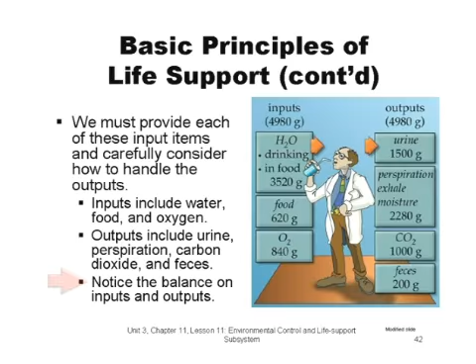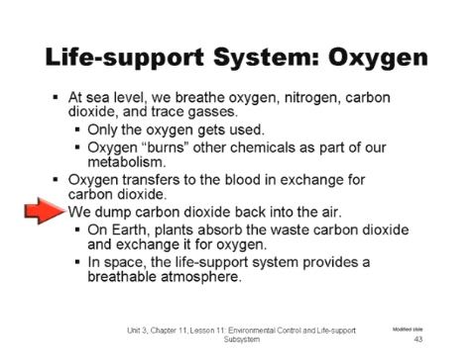In space, it's not that simple. In space, the life support system must provide a breathable atmosphere, which includes oxygen at a high enough partial pressure to allow for comfortable breathing. Without that, astronauts could not survive. The term partial pressure refers to the amount of the total pressure accounted for by a particular gas. The symbol for the partial pressure of O2 is ppO2, and we're quite comfortable with the ppO2 at sea level.

After becoming acclimated, people living at high altitudes, above 6,500 feet, show little discomfort with a lower partial pressure. The Space Shuttle's life support system maintains a partial pressure of oxygen close to Earth's sea level standard ppO2. You can see here a European Space Agency astronaut wearing a suit used to maintain the correct atmosphere around the astronauts in case there is a loss of cabin pressure during launch or re-entry.

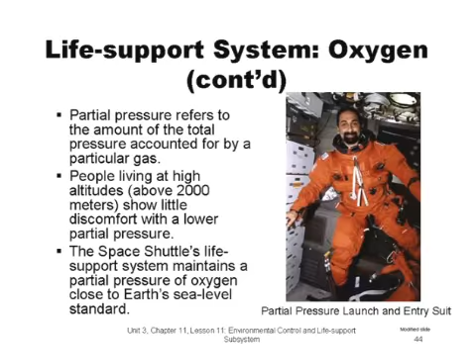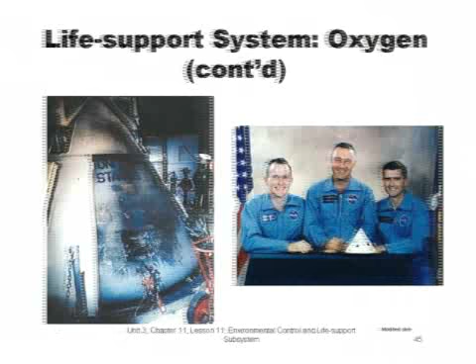Since oxygen is all we really use when we breathe, why not just use all oxygen in the crew cabin instead of air? When the partial pressure is too high, oxygen is actually toxic. Also, a pure oxygen environment can make it far too easy to start dangerous fires. This slide shows America's first major space tragedy, and it illustrates why we no longer fly with a pure oxygen environment.

On January 27, 1967, on Launch Pad 34, Edward White, Virgil Gus Grissom, and Roger Chaffee died in a fire during a routine pre-flight test on the launch pad. A spark started a fire in the Apollo 1 capsule that quickly got out of control, killing all 3 astronauts. Heroic doesn't begin to describe these men who, even though they were fully aware of the risks involved, still chose to head the mission for the cause of advancing our understanding of space.

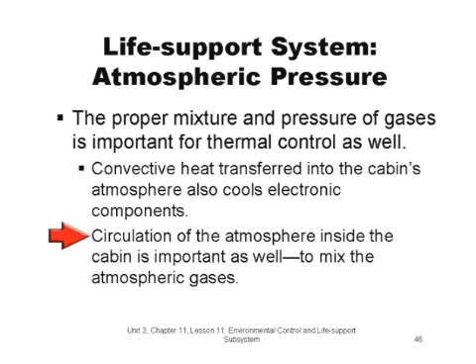The proper mixture and pressure of gases is important for thermal control as well. As we learned in the last section, convective heat transfer using the cabin's atmosphere can be used to cool electronic components. Circulation of the cabin's atmosphere is also important to ensure good mixing of the atmospheric gases in freefall.

Another key concern related to atmospheric pressure is that whenever astronauts do EVAs or spacewalks, they must leave the crew cabin atmosphere and use a spacesuit that provides all the comforts of home, including oxygen at the right partial pressure.

Unfortunately, if the total pressure in the spacesuit is near sea level conditions, it would be so stiff astronauts wouldn't be able to bend their elbows or close their fists. Imagine holding a tennis ball and trying to squeeze it tight.

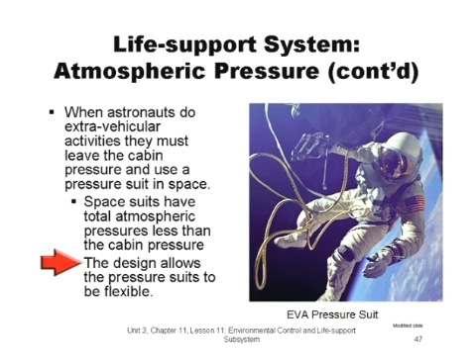For this reason, some spacesuits operate with a total atmospheric pressure lower than the cabin pressure. This pressure level allows the suits to be flexible so astronauts can more easily move around and work. However, this means lowering the cabin pressure several hours before a planned EVA so astronauts can get used to the lower pressure before stepping into the suit.

But problems can arise when people change from higher to lower atmospheric pressures. People may experience the bends we often associate with scuba diving. The bends occur when divers move too quickly from high to low atmospheric pressures. Scuba divers breathe in air. When a scuba diver is deep underwater, the pressure is higher, so more of the nitrogen in the air gets dissolved in the bloodstream. If they come up too quickly, that nitrogen can form bubbles in the blood, causing severe pain in the joints and even death.

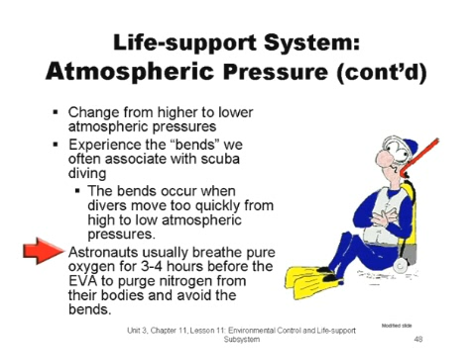To avoid this problem, spacesuits use a pure oxygen atmosphere with a partial pressure sufficient to sustain life. Before going outside, astronauts breathe pure oxygen for 3 to 4 hours to purge any nitrogen from their bodies so they don't get the bends.

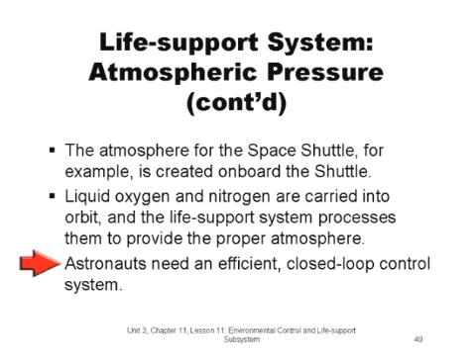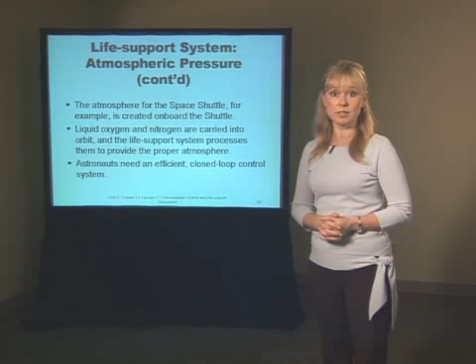Astronauts must take everything they'll need with them when they lift off. The space shuttle's atmosphere must be created and sustained with the resources on board. The shuttle carries liquid oxygen and nitrogen into orbit, and the life support system processes these raw supplies to provide the proper atmosphere. To do this effectively, astronauts rely on an efficient closed-loop atmospheric control system. Can you remember the difference between open-loop and closed-loop control systems? If not, go back to the section on control systems so you understand the concept.

Now, let's discuss other necessities, such as food and water. Just like you, astronauts get hungry and thirsty after a hard day in space and want something tasty and nutritious to eat or cool and refreshing to drink. But getting into space is very expensive, so we must determine exactly how much food and water to bring along. Too much and we waste precious cargo mass. Too little and astronauts go hungry.

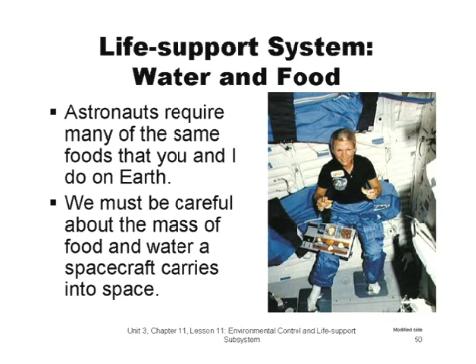The average person requires about 29 calories per kilogram of body mass per day to maintain their present weight. This means a typical astronaut who is about 70 kilograms needs at least 1,972 calories per day, and even more when strenuous spacewalks occur. Space food has come a long way from the peanut butter and orange drink called Tang used during the Gemini missions.

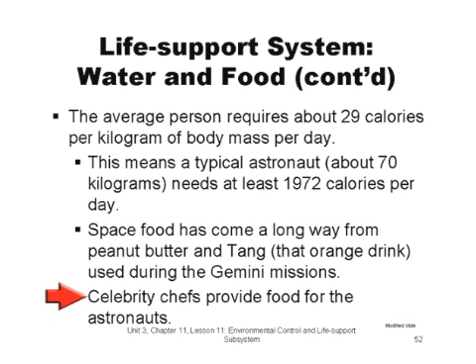Today it's become trendy for celebrity chefs to adapt their recipes for spaceflight. The emphasis now is on providing fresher foods, saving on mass and volume, and improving packaging that won't create as much trash afterwards. Much of the food for space missions is dehydrated or freeze-dried to reduce volume and mass. But for short-term missions and for eating in the first few days of any mission, astronauts may take fresh fruits and other perishable items. Typically, each astronaut needs at least 2 kilograms of food per day.

Water for the space shuttle comes from fuel cells that create electricity and water from hydrogen and oxygen. Because of the restrictions on volume and mass, the ISS requires water and food to be delivered by Russian Progress robotic spacecraft, or the space shuttle. It needs supply flights every few months to support its crew of 2 to 3 astronauts. You can see here a transfer of materials to the ISS from the European Automated Transfer Vehicle.

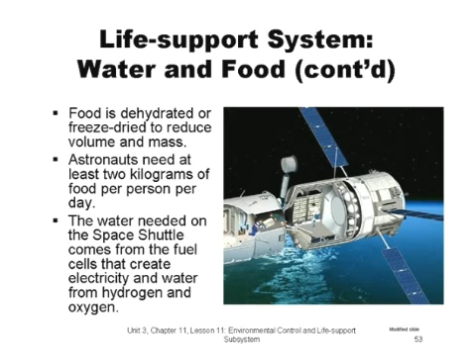We provide astronauts with food and water, but what happens to all that waste in the form of urine, feces, and carbon dioxide? Well, we need to dispose of them, and we're going to learn how.

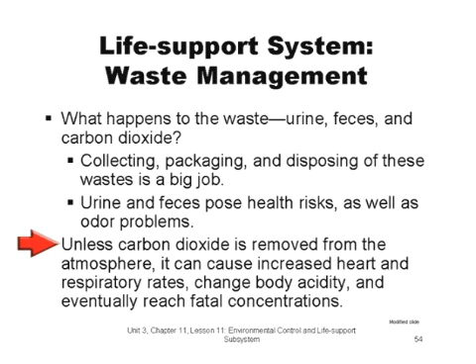Collecting, packaging, and disposing of these wastes are one of the biggest jobs of the life support system. Urine and feces pose health risks as well as odor problems. Carbon dioxide creates a subtler problem. Unless carbon dioxide is removed from the atmosphere, it can increase heart and respiratory rates, change body acidity, and eventually reach fatal concentrations.

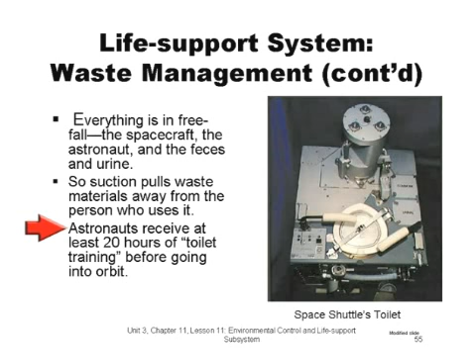A frequently asked question is, how do the astronauts go to the bathroom in space? The answer is very carefully. This is the space shuttle's toilet. Remember, in orbit, everything is in free fall. The spacecraft, the astronaut, as well as the feces and urine are all falling at the same rate. Feces in free fall can be a problem, so the space-qualified toilet uses a suction system to pull waste materials away from the person using it. Astronauts receive at least 20 hours of toilet training before going into orbit.

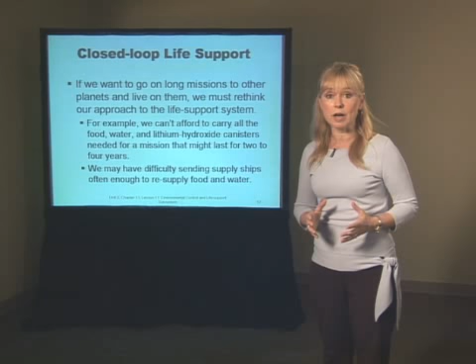If we intend to go on long missions to other planets and live on them, we must rethink our approaches to life support on the shuttle or space station. For example, we can't afford to carry all the food, water, and lithium hydroxide canisters we need for a mission that might last for 2 to 4 years. And we may have difficulty sending supply ships often enough to resupply food and water. Scientists are investigating life support subsystems that can retrieve and recycle water, which is the heaviest item. One limited approach to this idea is to retrieve gray water, which was only used for washing and rinsing, and reuse it for things other than drinking.

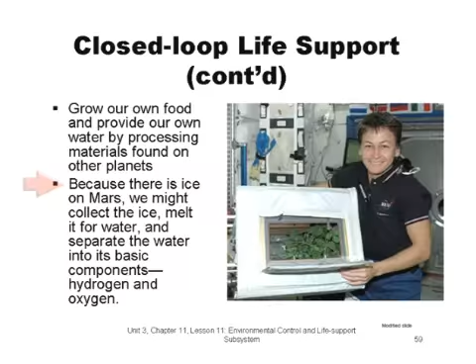We might also be able to live off the land. Mars, for example, has deposits of ice that we could collect and melt for water. We could also separate the water into its basic components, hydrogen and oxygen. We could then use the oxygen to refresh an artificial atmosphere. We could also use the hydrogen and oxygen as propellants to get back to Earth. So many possibilities exist here, but this is one of the challenges of future space flights. Remember, you could be one of the scientists or engineers who help meet this challenge.

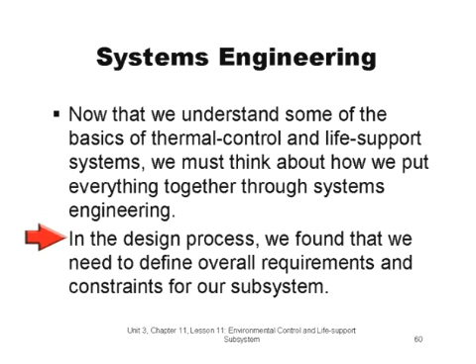Now that we understand some of the basics of the thermal control and life support subsystems, we'll look briefly at the inputs to the overall mission design process. Then we'll review some of the testing requirements spacecraft must go through before launching into the harshness of space. We also have to think about how we put everything together through systems engineering. In our overall design process, we found that we need to define subsystem requirements and constraints.

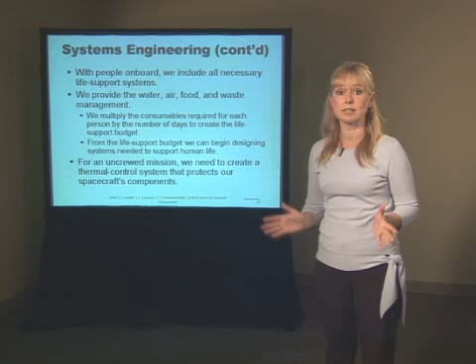If a spacecraft will have people on board, we must provide all necessary life support systems discussed earlier. We have to provide water, air, food, and waste management for the number of astronauts on board. We simply multiply the amount of consumables required for each person by the number of days in our mission to create a life support budget. Using this life support budget, we can begin designing the systems needed to support human life. If we're designing a robotic mission, we don't need a budget for life support, but we still need to create a thermal control system. Why is that? If you said because we have to protect our spacecraft's components, you'd be right.

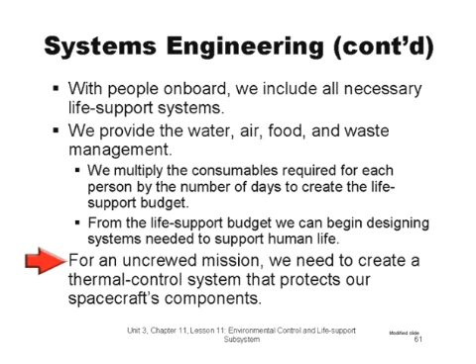Once we have a set of good requirements and constraints, we can begin analysis and design. Recall in the last section, we discussed the concept of thermal equilibrium. This concept is simple, but important, so we're going to show it again here. In order to maintain this state, the heat output must balance the heat input plus internally generated heat.

This is one of the biggest challenges for the thermal control system, especially if we try to do it for all mission conditions. For example, during ground testing, pre-launch and launch, as well as on orbit. Keeping things cool in full sunlight may be no problem. Keeping things warm during an eclipse may be no problem. But keeping things at the right temperature at both extremes and everything in between will likely require detailed investigation.

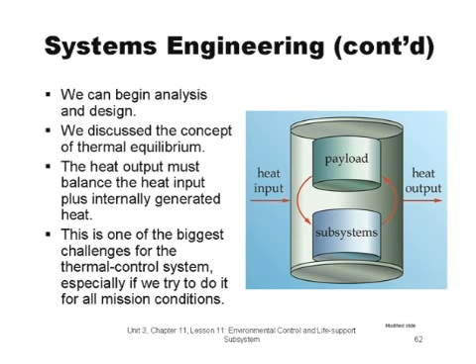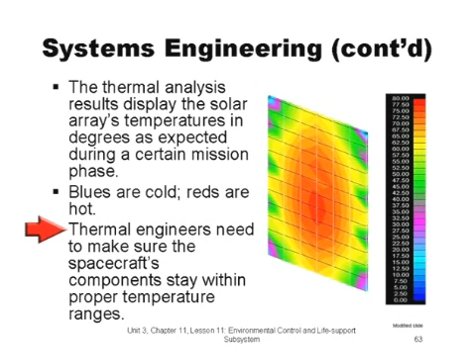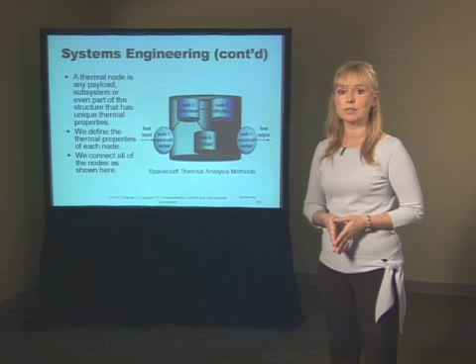For example, the thermal analysis results shown here display the solar array temperatures in degrees Celsius expected during a certain mission phase. The blues are cold and the reds are hot. Thermal engineers need to work closely with the engineers from all other subsystems to make sure the spacecraft's components stay within proper temperature ranges. A detailed thermal model is the best method to predict temperatures at every place in the spacecraft. This is done by dividing the system into a series of nodes.

A thermal node can be any payload, subsystem, or even part of the structure that has unique thermal properties. The spacecraft thermal analysis method has us connecting all of the nodes as shown in the figure here. We can then tackle this big problem one small piece at a time by looking at each node individually to define the unique thermal properties of each one and understand the heat conduction and radiation between nodes. Once this is understood, we can then use computer analysis to determine overall system temperatures when all the nodes are connected in different environments, say full sun or during eclipse.

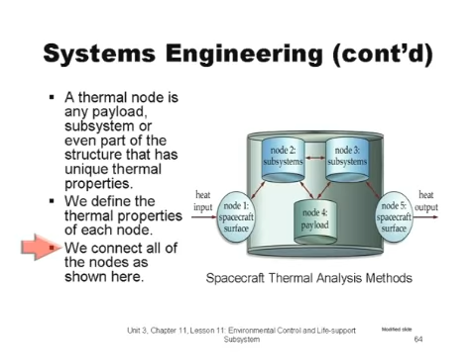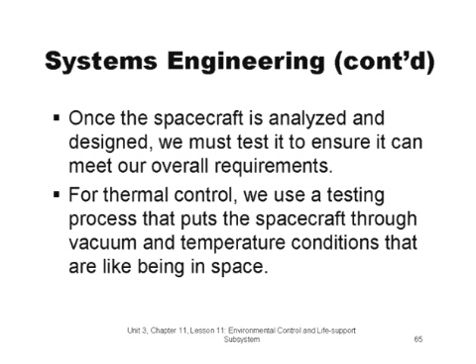Next, we must test it to ensure the spacecraft can meet all requirements. Will the batteries be too hot or too cold? Will the onboard radio be at or near room temperature? The computer analysis we just looked at will make predictions, but we want to be sure those predictions are right before launching our expensive spacecraft into space. If we find problems there, it will be too late to fix them.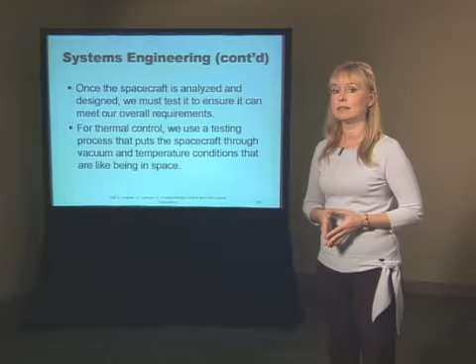So, to test our predictions, we typically put the entire spacecraft into a large vacuum chamber and measure temperatures at various points while we increase and decrease the chamber temperature to simulate conditions in space. During these tests, we measure the spacecraft's temperature and compare the results with our predictions. If the test results don't match our analysis, we try to figure out why.

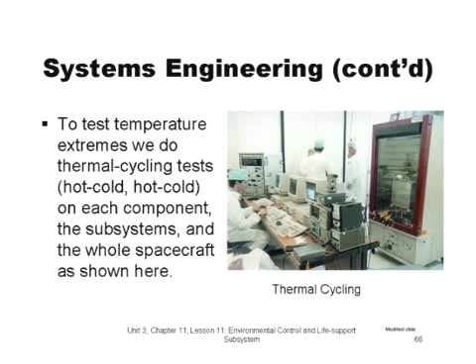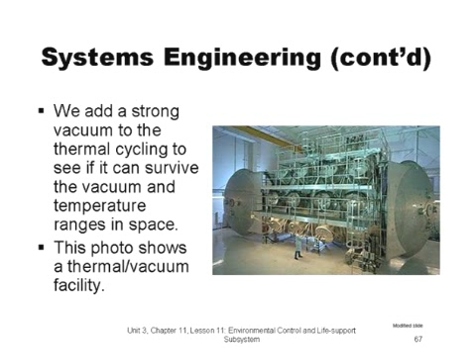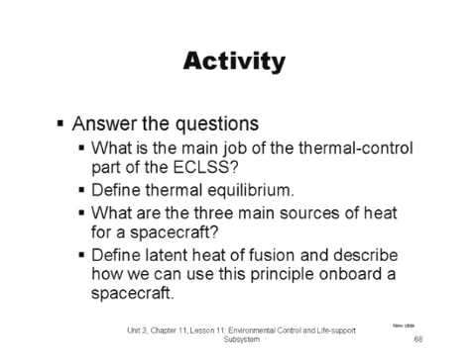In this lesson, we focused on the environmental control and life support subsystem, which we refer to as the ECLSS. We learned the ECLSS must provide a livable environment in the harshness of space. The tasks of the ECLSS are divided into two problems: thermal control and life support. We looked at ways to meet the thermal control demands. Then we examined challenges caused by placing fragile humans on board. Finally, we studied some of the major systems engineering issues of ECLSS design.

A spacecraft consists of many subsystems that must work together to keep the spacecraft functioning properly to meet overall mission objectives, requirements, and constraints. The ECLSS is one of those subsystems that provide a livable environment to keep people and machines healthy and happy. Now that we have a good understanding of spacecraft, payload, orbits, and trajectories, we're ready to learn about propulsion and launch systems, how we operate spacecraft and use them to meet our overall objectives.